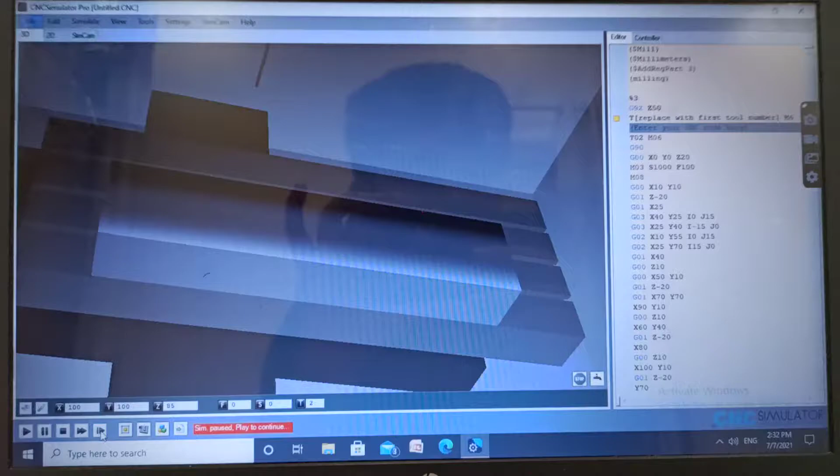Workpiece dimensions are 350, 80 and 50. Tool dimensions are 2 mm diameter and 100 mm length. Tool name is T02. T02 M06 is tool change, and G90 is absolute programming.

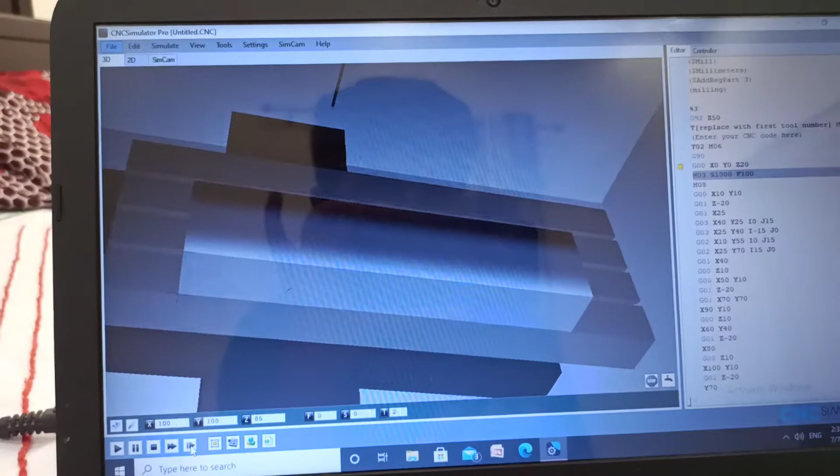G00 is fast transfer to the point, like this. And M03: here the spindle starts rotating in clockwise direction with a spindle speed of 1000 rpm and feed rate of 100. M08 coolant on. G00 is again fast transfer to the point, like this.

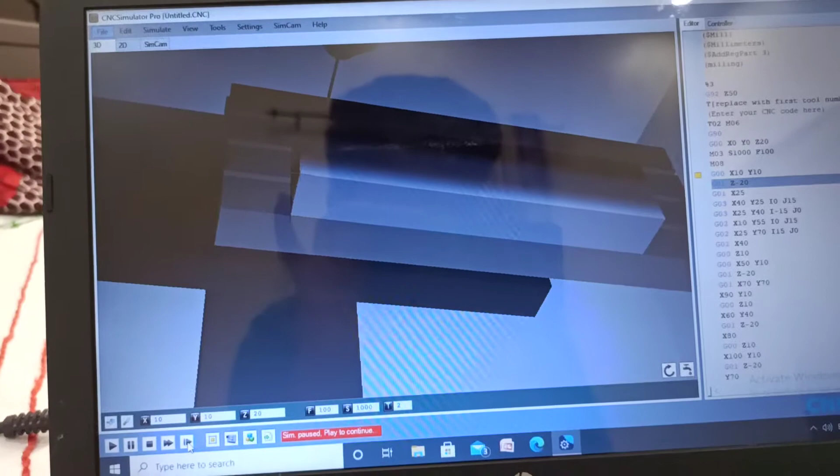And then G01 is a cutting movement, but it is a slow transverse movement in the Z direction to -20, like this. And then to X25. Now G03 is circular interpolation in CCW, that is counterclockwise direction.

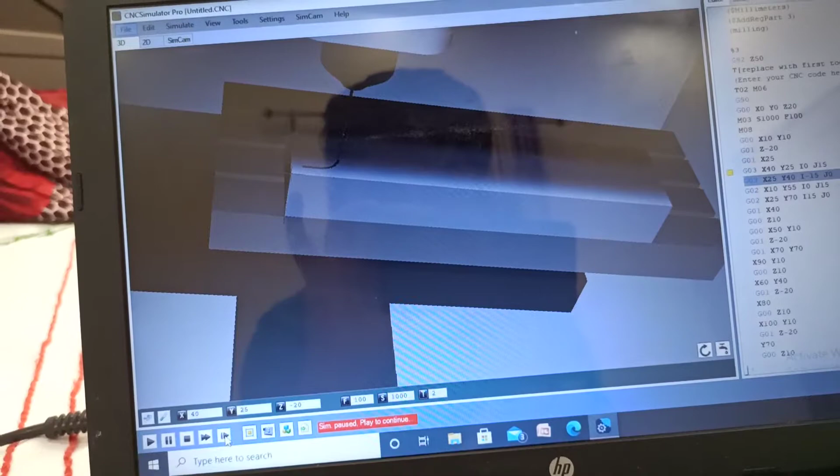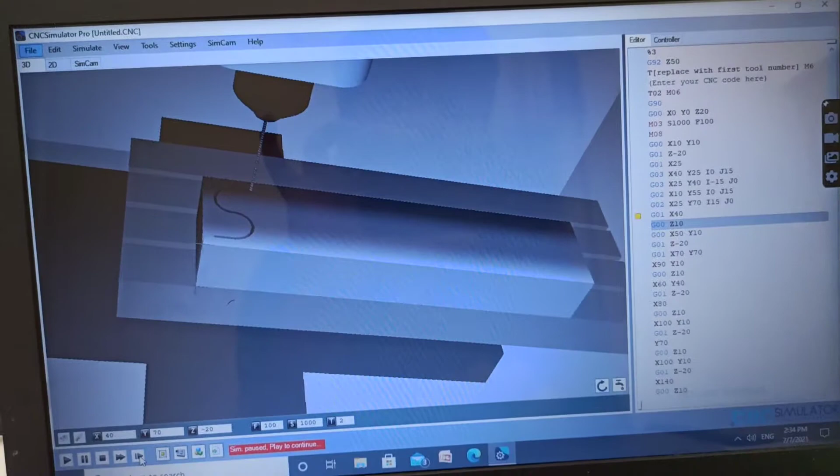Then now G02 is circular interpolation in clockwise direction again. Now G01 X40 is linear interpolation to X40. Now G0 Z10 is for tool retraction. Now X50 Y10, tool moves to X50 and Y10.

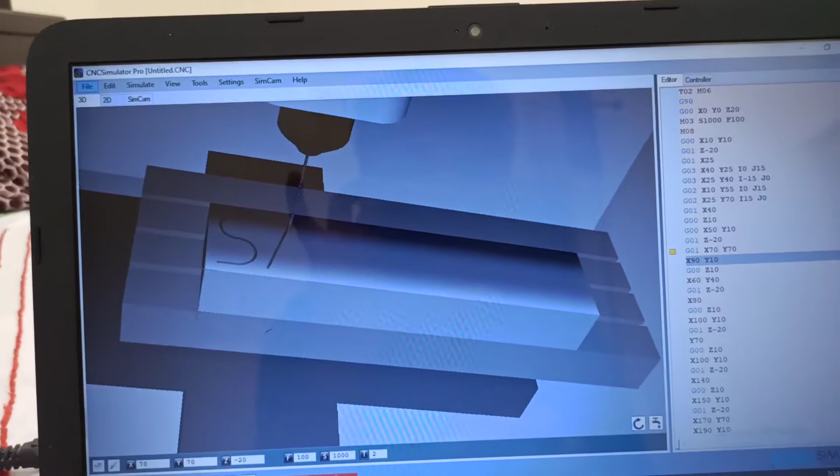G01 is linear transfer to Z -20, like this. Now linear transfer to X70 Y70. Now to X90 Y10. Now tool moves out, G00 Z10, tool placed at X60 Y40.

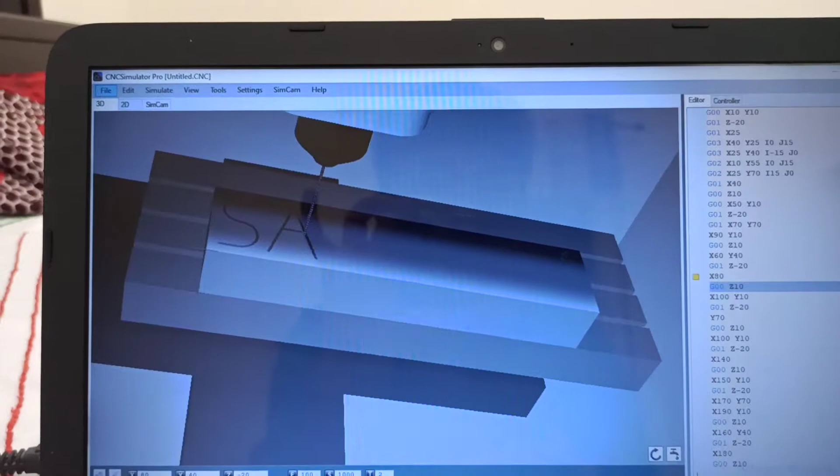Now G01 Z -20 again. Now the tool moves to X80 linearly. Now G00, tool moves out, placed at the point X100 and Y10. Now G01 Z -20. Now it moves to Y70, it moves to Y70.

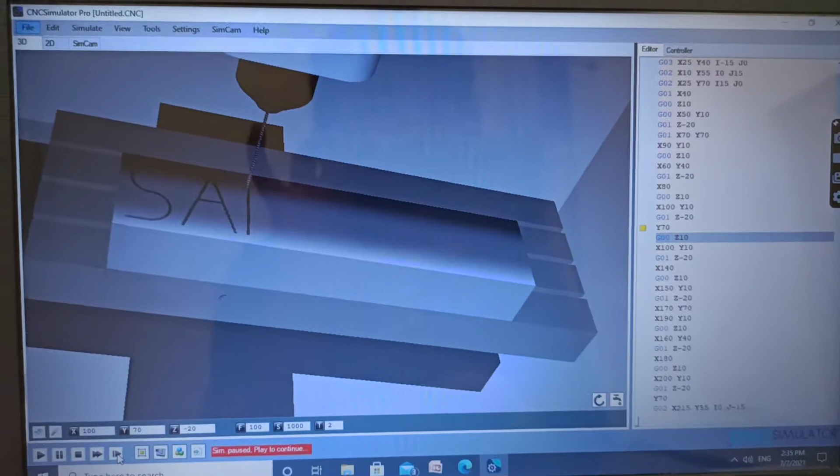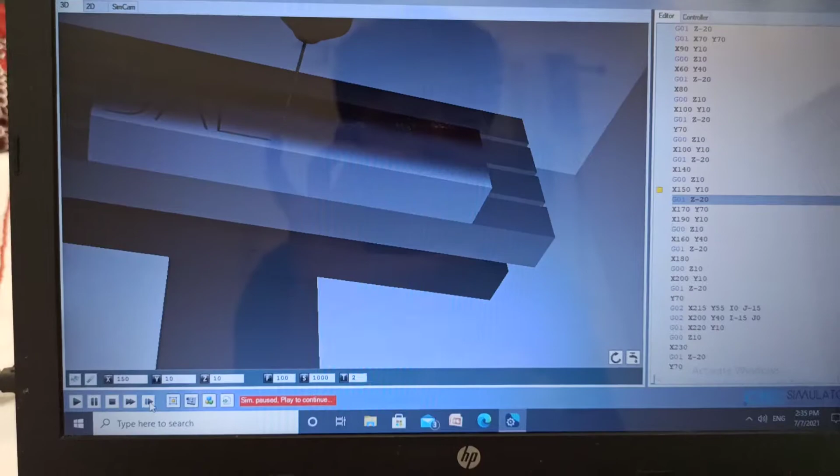Now G00 Z10, tool moves out, and then again placement of the tool, and then again to X140, tool moves out, placed at the point, and then G01 Z -20. Then tool moves to X170 and Y70, like this. And then to X190 and Y10.

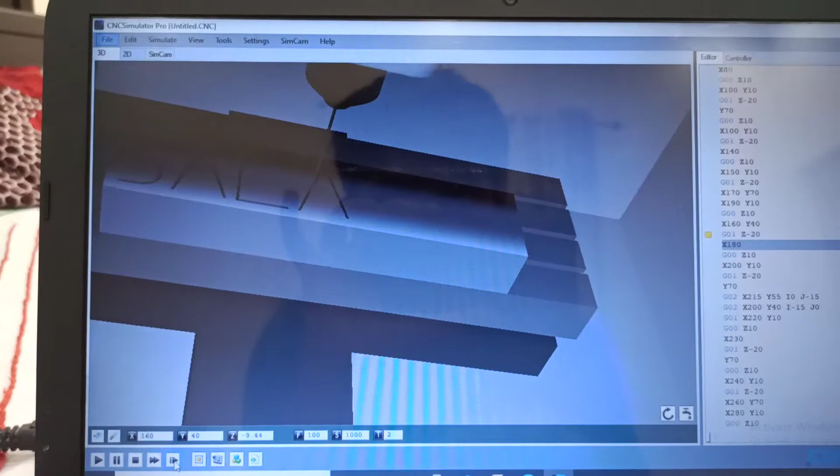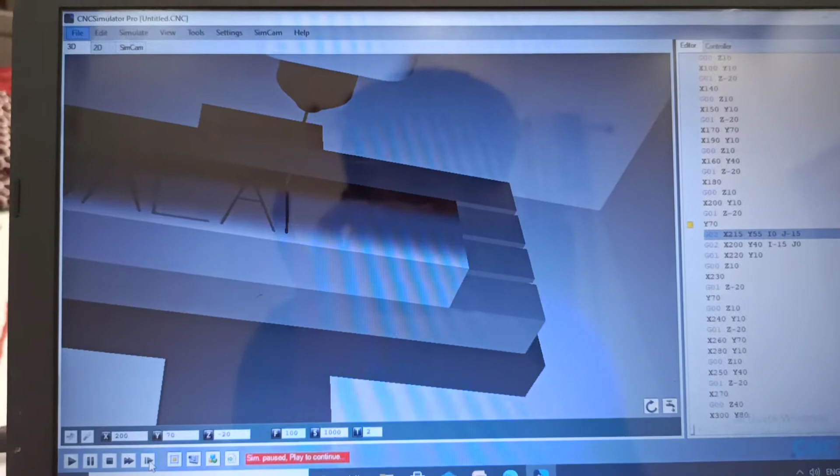Tool moves out, placed at the point, linear transverse. And then to X180, tool moves out, placed at the point of the start, and then again. And then from Y10 it moves to Y70, and then it is G02, circular interpolation in clockwise direction. Now circular interpolation again in clockwise direction.

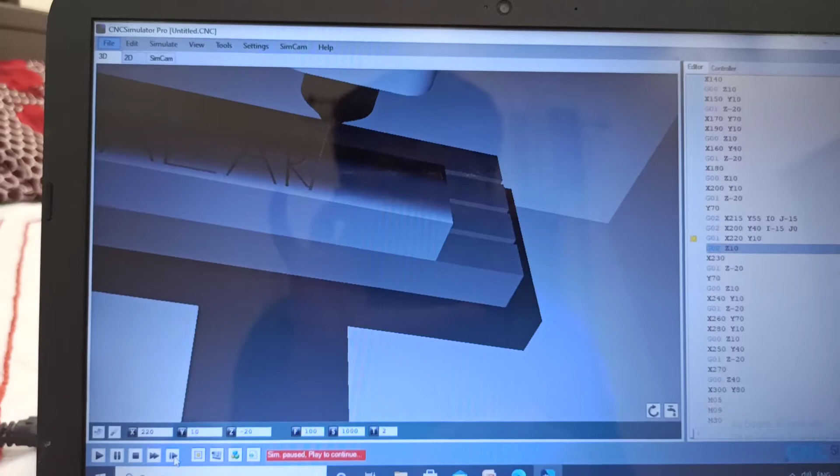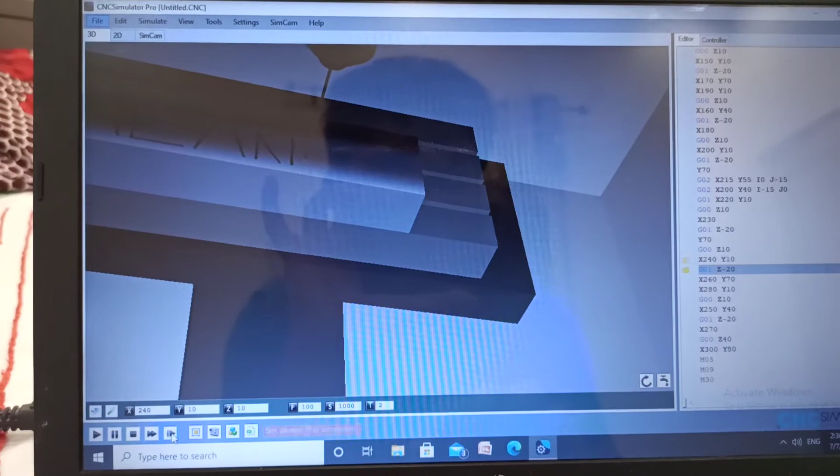Now G01, linearly to the point X220 and Y10. And now retraction, and then placement for the next step again. And then it moves to Y70, again retraction, and it moves to the point X240 and Y10, and then linear interpolation to Z -20, and then to X260 and Y70, and the procedure continues the same.

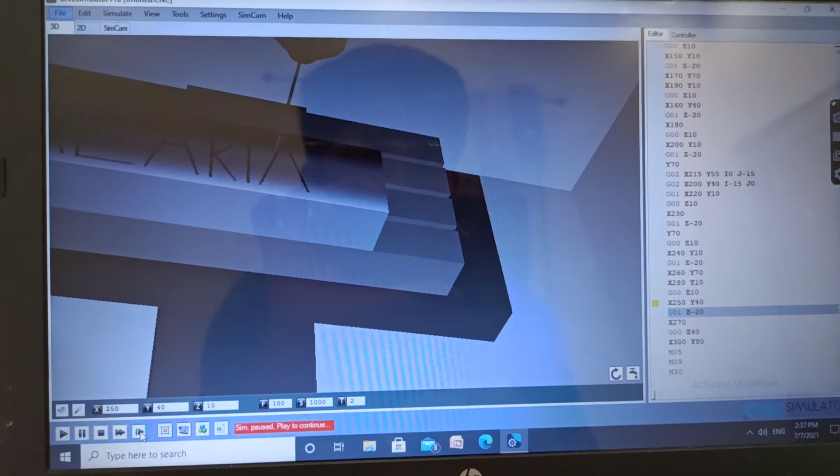And then again retraction, placed at the point 250 and 40, and then G01 Z -20, linear interpolation in Z direction to -20, and then it moves in X direction to the point X270, and then the tool moves out to Z40 and X300 and Y80.

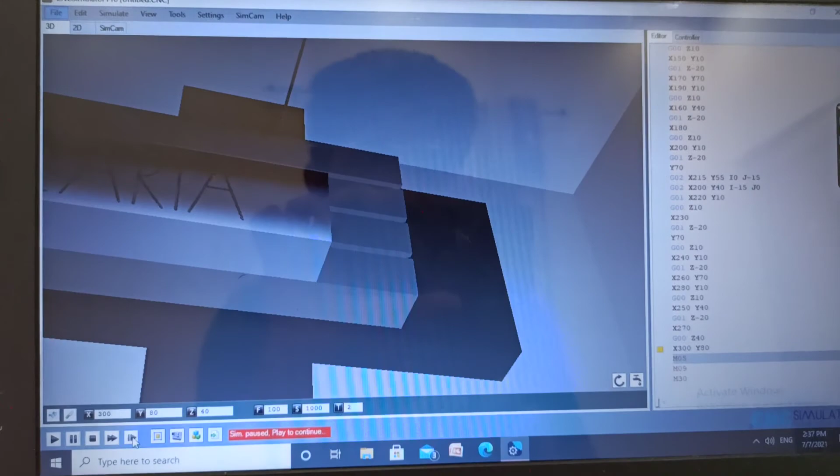And M05 stands for spindle stop, M09 stands for coolant off, M30 end of the program.